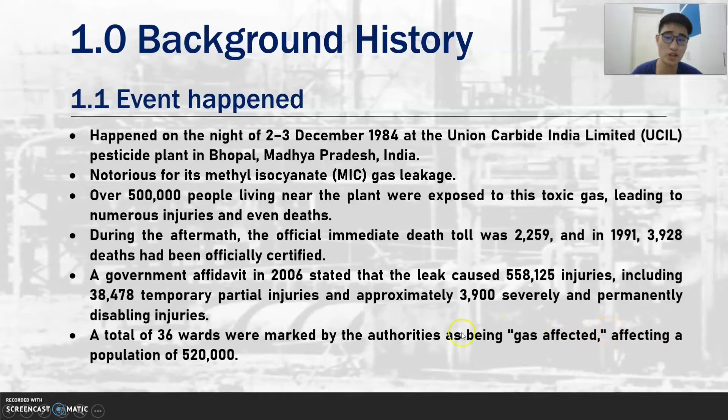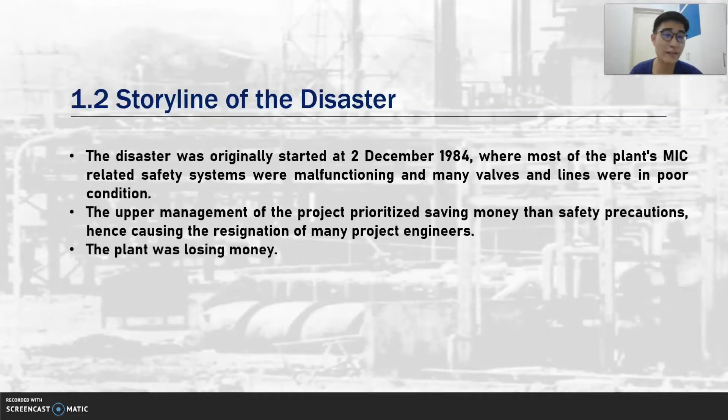520,000. So the storyline of the disaster is, it all begins on the night of 2 December 1984, when most of the plant's MIC-related safety systems malfunctioned. They could not be used, and many pipes and lines were in poor condition. And furthermore, the plant was losing money at that time. And the upper management was also very greedy. They tended to prioritize saving money over any safety precaution.

So, for the initiation and propagation of the disaster, initially in the late evening hours, water backflowed into the tank, we can say the MIC reactor, while the water was trying to unclog it. After that, the pressure rose from 2 psi to 10 psi due to the exothermic reaction of the water and the MIC gas. The workers initially thought that this was a small deal, so they didn't care about it.

After a while, they found out that there was a leak at 11:45 p.m. as they smelled a stench of the MIC gas. So they decided to solve this problem after a tea break. So 5 minutes after the tea break, suddenly the reaction happened in the reaction tank, which caused a critical state, and the temperature and pressure rose beyond an uncontrollable level.

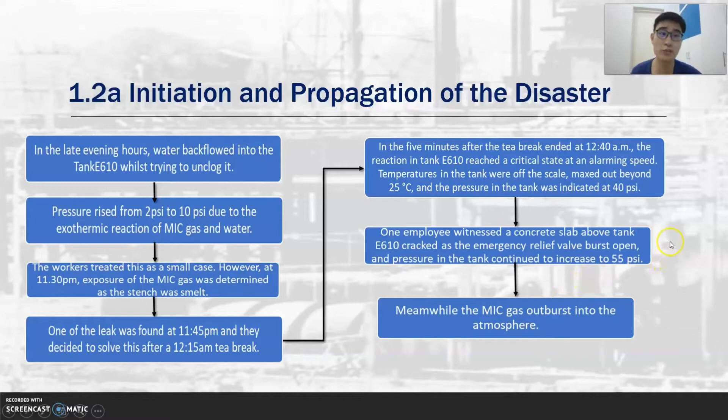One of the employees witnessed the concrete slab above the tank crack as the emergency relief valve burst open, and the pressure in the tank increased to 55 psi. Meanwhile, the MIC gas burst out into the atmosphere. So now let's proceed to the aftermath of the Bhopal disaster. 30 tons of MIC gas escaped to the atmosphere, and you can imagine how dangerous it will be when it comes to the village area.

One of the employees triggered the plant alarm system at 12:50 a.m. and unfortunately, another employee switched off the outer alarm, which had been decoupled from the inner alarm since 1982 to prevent alarming the public around the factory over tiny leaks. They didn't want to let the public know about the tiny leaks because they thought it was not a big deal, but it is a big deal for us.

So after that, the news reached the police through a town inspector, as the town inspector called the police about how the residents smelled the stench of the MIC gas, and the UCIL manager told the police that everything was under control. But the leakage was not a small deal anymore because it kept on giving out toxic gas to the environment. So after that, the MIC gas leak petered out at approximately 2 a.m.

After that, 15 minutes later, the public siren sounded. After the public siren sounded, a UCIL employee walked to the police center and told the police that the leak had been plugged. Actually, the leak was not plugged, but the gas flow had finished. So they assumed that the leak was plugged because there was no gas coming out from the tank anymore.

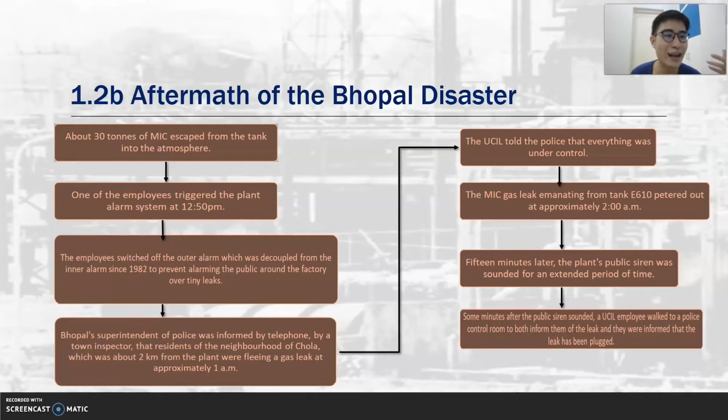So next, we are going to talk about the 3 types of hazards. One is material hazards, second is energy hazards, and the third is chemical reaction hazards. So I am going to talk about the energy hazards. There are mechanical energy, thermal energy, chemical energy, electrical energy, pneumatic energy, hydraulic energy, and explosive energy. As for mechanical energy, any mechanical parts that can cause physical injuries are called mechanical energy hazards. And as for thermal energy, this is because of the high temperature.

The MIC reactor causes overwhelming thermal radiation. Chemical energy is because of the poisonous MIC gas, which will destroy our lungs, and the extremely flammable MIC gas can burn out the plant. Electrical energy is caused by malfunctioning of the fuse and capacitor, leading to an outbreak of high voltage output. Pneumatic energy is compressed gas at very high pressure, caused by the exothermic reaction between the MIC gas and the water.

After that is hydraulic energy, which is also caused by the reaction with water, caused by the backflow of water leading to the reaction of water and MIC gas. After that is explosion energy. The explosion did not occur in this case, but we assume that it would occur when the condition is uncontrollable. It will cause a big explosion when the condition becomes very dangerous.

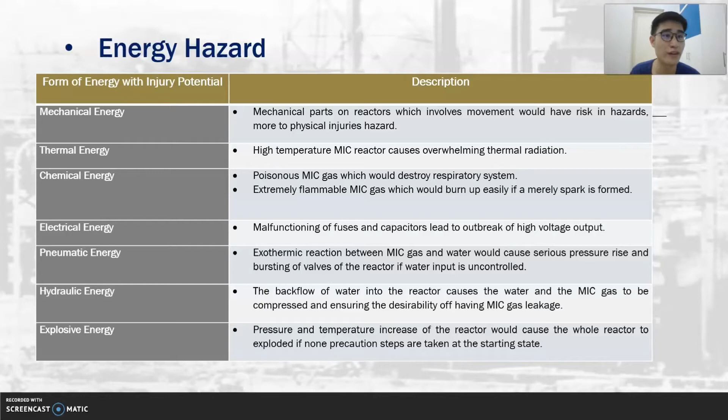Hello everyone. Next, I will continue with the process hazard. Secondly, it is the material hazards for methyl isocyanate. From the pictograms, we can see that methyl isocyanate is flammable, harmful, and also has health hazard. Basically, methyl isocyanates are colorless liquid with strong and sharp odor that can cause tears.

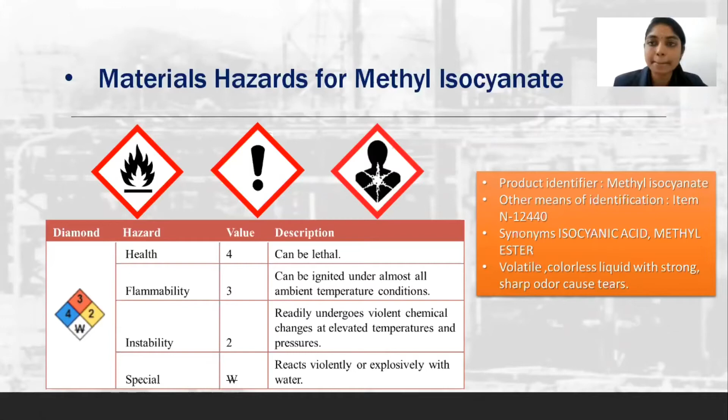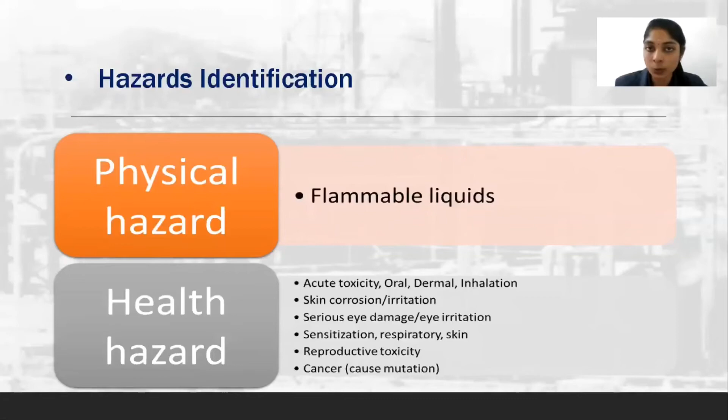There are two types of hazards, which are physical and health hazards. Methyl isocyanates are flammable liquids that can cause skin irritation and corrosion. They can also affect the eyes and cause cancers in the meanwhile. There are many activities that can be conducted to prevent the exposure of methyl isocyanate: first aid measures, handling and storage, and exposure control.

It is advised to store this methyl isocyanate in a cool condition, while to avoid the exposure, we should wear personal protective equipment, respiratory filter device, gloves, and also tightly sealed goggles.

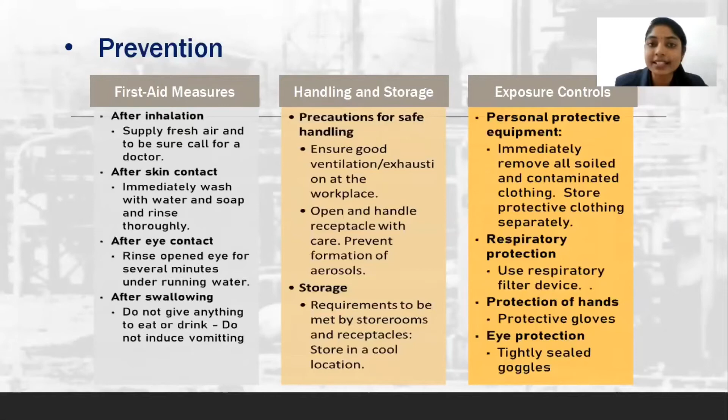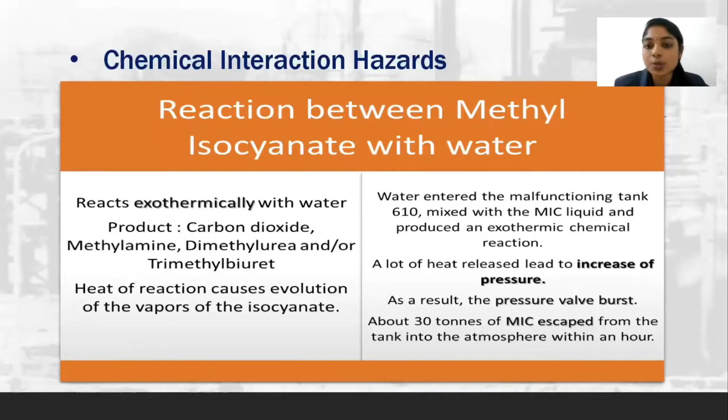Thirdly is the chemical interaction hazards, where in this plant, the reaction between the methyl isocyanate with water was undesirable. This reaction was exothermic. They release a huge amount of heat that caused an increase in the pressure. Due to the increase in the pressure, the valve burst and about 30 tons of MIC escaped from the tank.

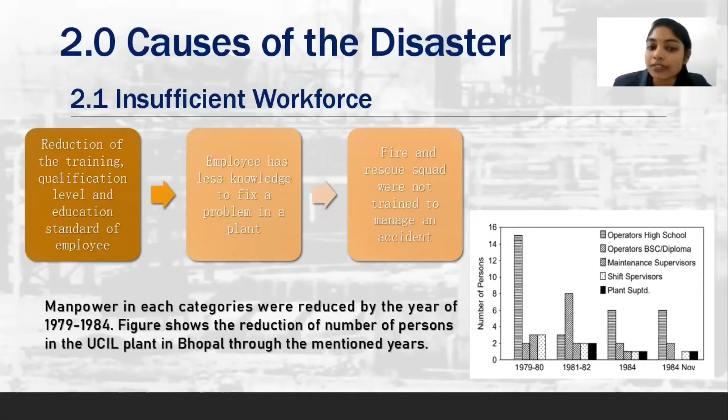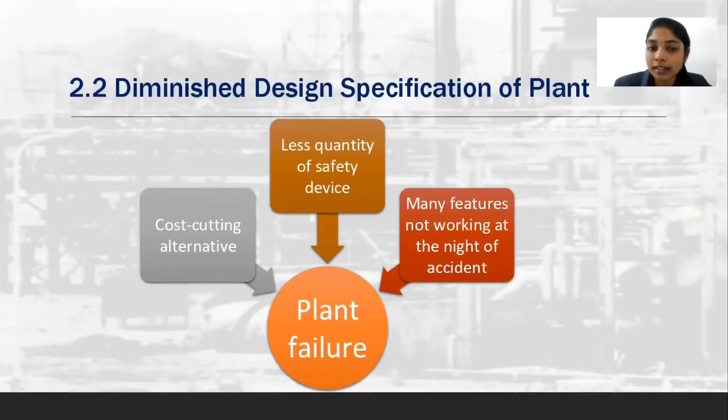Next, it is a diminished design specification of the plant. This design has caused the plant to fail. The management approached the cost-cutting alternative by reducing the number of safety devices in the plant. In fact, many features were not working at the night of the accident.

This table shows the comparison between the MIC plant design in West Virginia and also Bhopal. From the table, we can see that many safety devices were reduced in number and there were no emergency calls existing in the Bhopal plant.

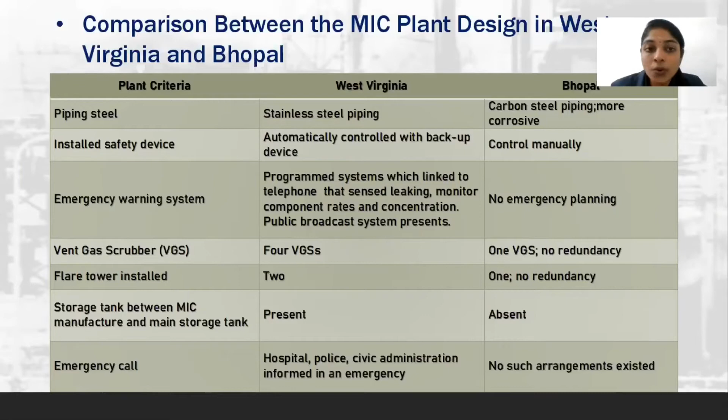Thirdly is the management decision. The management decision played a huge part that led to this disaster. The management decided to shut down the refrigeration unit to save power, and they also switched off the siren, which caused the neighborhoods to not be aware of the explosion or the release of the methyl isocyanate.

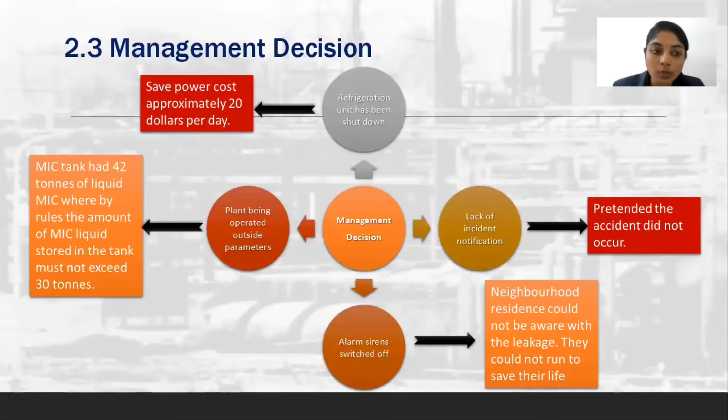There was a lack of incident notification during this accident, and the plant was being operated outside the parameters. The MIC tank had 42 tons of liquid, whereas by rules the amount of MIC liquid stored in a tank should not exceed 30 tons.

Next, it is the deficient maintenance of the plant. Plant operators failed to move some of the MIC in the problem tank to the spare tank because the spare tank was not empty. Carelessness during the water washing: they did not check the related lines, they did not disconnect various lines, and they did not place slip blinds during the washing routine.

Malfunctioning of the pressure control valve. A jumper line connected a relief valve header and a pressure vent header. Safety devices were not repaired, such as the flare tower, which was turned off waiting for maintenance. The temperature sensor and the alarm for the MIC storage tank were out of service for almost 4 years.

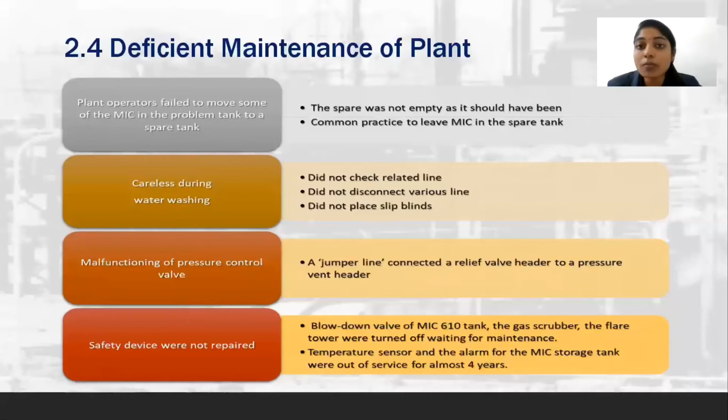And lastly, it is the ignorance of the employees. The supervisor ignored the initial warning of the leakage. The MIC storage tank gauge indicated the pressure had risen 5 times in an hour. Besides, an operator spotted a drip of liquid and some yellowish white gases in the same area.

However, the supervisor would like to have tea first before checking the leak. The supervisor also assumed that the leakage was probably a water leak. These are the main causes that led to this disaster.

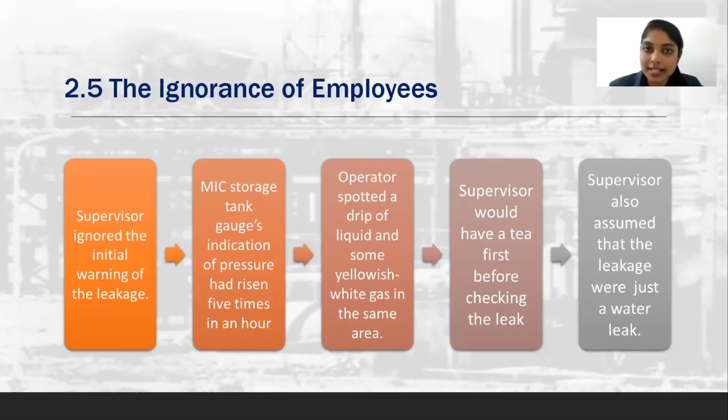Hi, I'm Alif Iqmal. Now I will present to you the actions taken afterwards. The first one, subsequent legal action. Legal proceedings involving the Union Carbide Corporation, US and Indian governments, local Bhopal authorities and disaster victims began. The Indian government passed the Bhopal Gas Leak Act in March 1985.

On 17 April 1985, a Federal District Court judge suggested that UCC was required to provide between 5 to 10 million US dollars as preparation to help the injured. The UCC offered a 5 million US dollar grant fund 2 years later, but the Indian government rejected the offer.

Finally, in an out-of-court settlement reached in February 1989, Union Carbide agreed to pay US $470 million for damage caused in the Bhopal disaster. Second, post-settlement activity. In 1991, the local Bhopal authorities claimed Warren Anderson, the CEO of UCC, committed a crime that carries 10 years in prison. In this case, he was named as the chief defendant, but he failed to attend the court hearing.

In September 2006, the Welfare Commission for Bhopal Gas Victims announced that all original compensation claims and revised petitions had been cleared. In June 2010, 7 former employees of UCIL, all of them local workers, were convicted of causing death by negligence.

The third is long-term action. There are 3 of them: healthcare, environmental, and occupational and habitation. So, for healthcare, Bhopal Memorial Hospital and Research Center was established and obliged to give free care for survivors for 8 years. 8 mini units were started and free healthcare for gas victims was offered. Sambhavna Trust is a charitable trust that gives modern as well as Ayurvedic treatments to gas victims free of charge.

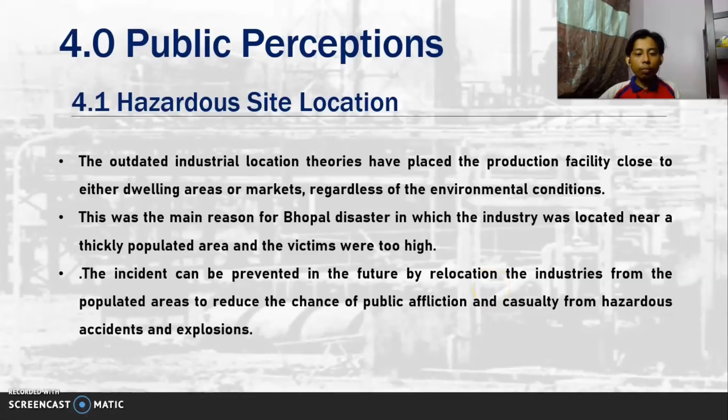The incident can be prevented in the future by relocating the industries from the populated areas to reduce the chance of public affliction and casualty from hazardous accidents and explosions. Next is contamination in soil, water, and air. Various organizations fighting for gas leak survivors have been seeking proper medical care, adequate compensation, and cleaning of the groundwater and soil which became contaminated after the incident.

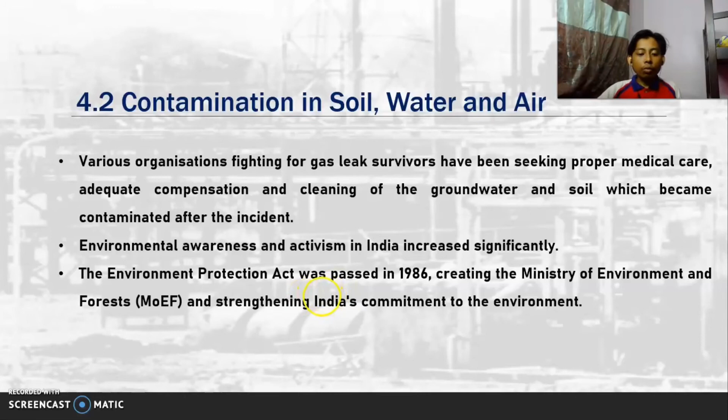Environmental awareness and activism in India increased significantly. The Environment Protection Act was passed in 1986, creating the Ministry of Environment and Forest and strengthening India's commitment to the environment. So, under the new act, this ministry was given overall responsibility for administering and enforcing environmental laws and policies.

Next is, this industry has the worst industrial management system. The safety infrastructures are kept at a poor level. There will be loss of people's lives in this fiercely competitive global industrial environment. The industrial disaster of Bhopal had worse management, maintenance, and non-compliance of industrial safety rules.

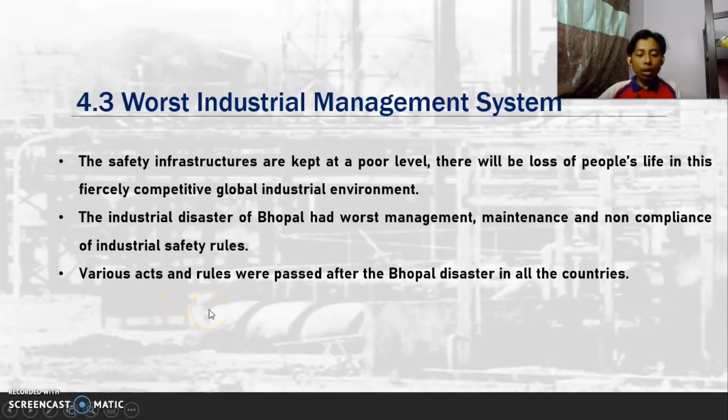Various acts and rules were passed after the Bhopal disaster in all the countries. So, examples of acts: first, the Bhopal Gas Leak Disaster Act 1985. Next is the Environment Protection Act 1986, and lastly is the Factories Act 1987.

And lastly, this industry has poor risk or hazard assessment procedures and practice. Poor risk assessment practice in toxic facilities, so that they failed to perceive the gravity of the situation after the trigger event. This disaster paved the way for the importance of reliability, availability, maintainability, and safety criteria to follow effective management techniques.

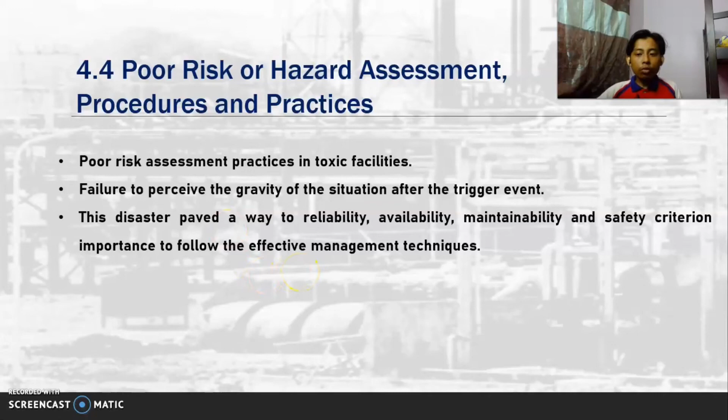In conclusion, in our own perception of this Bhopal disaster, poverty is one of the main causes, because at that time many citizens were very poor. They tended to find work at the plant. After they had been hired, they were asked to do something they did not know how to do, because those kinds of tasks were not their expertise.

So next, the main cause also includes the arrogance of the management department, because they were so much concerned with the money saving process rather than the maintenance services, like the lack of personal protective equipment and maintenance of systems in the plant, causing more injuries and even death. They didn't even care about the safety precautions, they just cared about the money issue.

And furthermore, greed brings destruction. Greediness makes one concerned about oneself only and only concerned about money. They cannot think of anything else except themselves. Therefore, to treat this kind of thing, we need to find a good leader, a far-sighted leader to move on the right track. Because a good leader will lead the team and understand their team very well.

Just like what we have portrayed in the Bhopal disaster, the UCIL manager had to be a good leader in order to prevent this Bhopal disaster from occurring again. So to further improve this process, self-realization is very important, because if you know your own mistakes, you can change them. So it can eventually demolish your greediness.